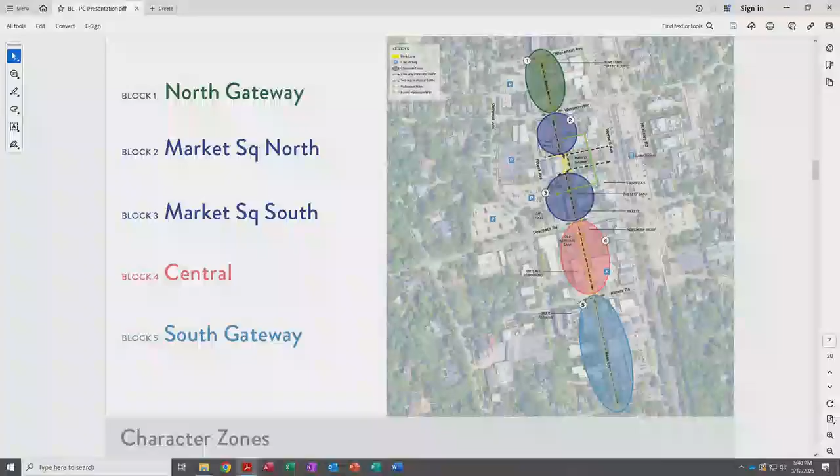So this is really hard to do. I always have struggled because it's so far away, but I'm going to start with Block 3, because Block 3 is the block, to me, we're starting that now, right?

The construction and more detailed design - this is where it came out in the wash, and the idea that we can tie into Deerpath and create a kind of continuous streetscape coming around the corner.

Things to consider here were the scale of Bank Lane - we kept hearing European, or almost like that alley type scale, very narrow. You have a few parallel parking spots. So we did a bunch of different concepts, but this is what was the preferred concept.

That concept shows brick pavers throughout, both in the street and the sidewalk, allowing for more flexibility. So that was something that, if we're able to, we're showing the idea that we can have bollards on the ends and close it off for maybe a festival, a market, on the weekend, whenever, so that you can have tents out there and people walking out on the street and enjoying that.

Keeping in mind those east-west connection points to parking and other things, we're always trying to have some kind of connection there visually. So we show the idea, at least conceptually, of changing the paving so that you can go to that cool little plaza or alley behind that leads to Starbucks, and then extending to the west as well.

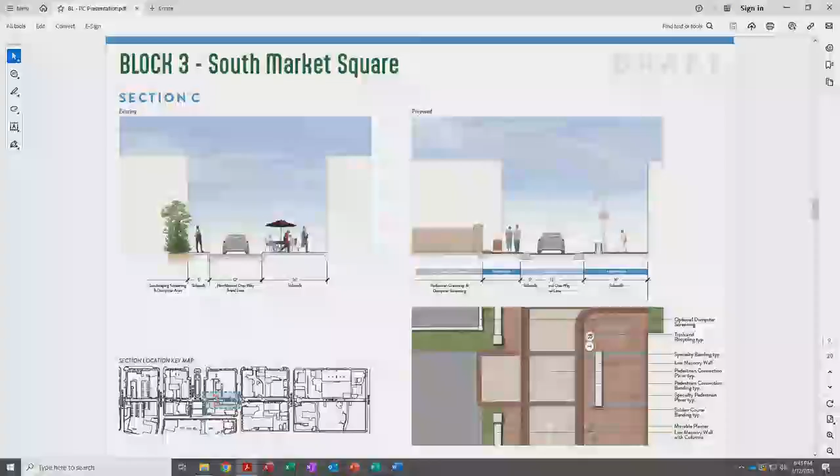Moving north to the North Market Square block, what we really did is we didn't take out any parking spaces, but we shifted some stuff around to align with what's happening on the blocks. Specifically, you have this great plaza with the water feature there, but then there's a parking space right by it, so we tried to shift some of that around so it made more sense and felt more cohesive.

But again, in this block it still has that tight character, so again bringing the brick pavers into this zone as well. We have a little bit more room to get some street trees or landscape elements in there. We've been very judicious about where those go, because we want to make sure that anything we put out there really thrives and does well. But in this zone we have a few more areas where we do that.

We're bringing in some seating and some benches, and there are still a few parallel parking spaces in this area that allow for convenient spots - if we're going to pull up and go to the post office, or just hop out for a few minutes, you've got those as convenient spots.

This shows an enlargement of that cross section, and how we're delineating the parallel parking with the granite banding, separating that from the vehicular lane. It's a visual way to separate all of those things within the zone - from pedestrian, to where vehicles are, to where parking is, and then pedestrian on the other side.

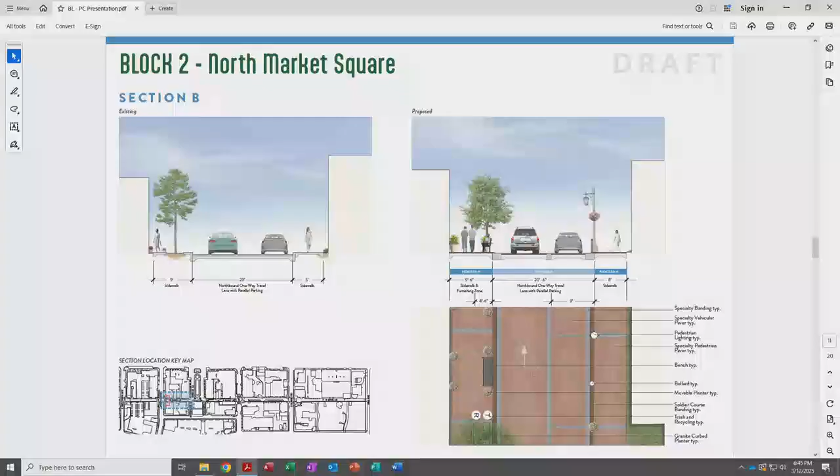Heading to the north, what we're calling the North Gateway area, much different character. You've got Hometown, and every time I go there, it's crazy busy with a ton of people, and it's a great use. But there are a lot of curb cuts in this area. It's just way more open. You don't have that street wall frontage consistently throughout this zone, particularly on the west side where the city lot is.

One thing we proposed here is bringing in a masonry wall that would screen the parking and close off one of the curb cuts of that public parking lot on the west, the one furthest north, so you don't have so many conflicting curb cuts all in one zone, since there are people on bikes and walking around right there. We're trying to eliminate some of the conflict areas, because you really don't need it. You can circulate internally on that parking lot, and that helps close off the gap, creating almost a wall effect like there was a building there.

Notice in this section we just have an asphalt drive, like you have out there now, but bringing the brick paver element at the intersections and crosswalks so we have a consistent look throughout. We're bringing that material in certain zones where pedestrians are, where we want cars to slow down, where we know we're coming to a stop, so you have that linkage and create a cohesive material palette. And we've got more street trees in this zone because we have more light and more area, which I think would really help soften things up.

There are some overhead utilities here. I think that's a consideration - ultimately we want to bury those. There aren't as many here as in the very far south of the corridor, but we're thinking about how to improve the aesthetics of this area by bringing in a little landscape and some of these other elements we're talking about.

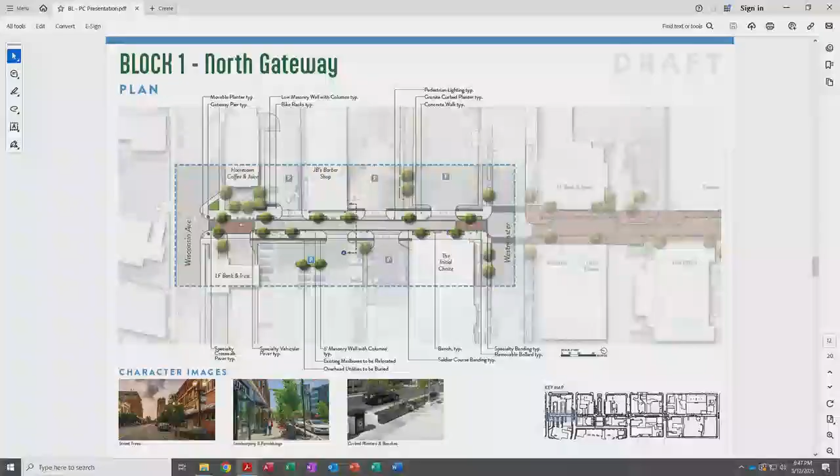This just shows a cross section of that, with the tree and a little landscape instead of overhead utilities and concrete.

Block 4, the central block. This is the block south of Deerpath, the one that has diagonal parking now. We tested a range of things here, from parallel parking to diagonal parking, weighing what people thought, and as of now we're showing this concept with diagonal parking that improves on what's out there now. Right now, if you turn from Deerpath onto Bank Lane going south, you're basically headed into a car parked diagonally - there's nothing that signifies there's a travel lane.

So we're formalizing that by bringing in landscape islands, so you have a very delineated travel lane versus parking lane. We've also extended the parking distance a little bit, because right now it's super tight. A lot of people park, and particularly backing out coming from the parking lot to the east, there's a conflict where people are backing up into the parking lot while others are trying to come out. So we're really trying to delineate everything with visual materials and make sure we have the right dimensions.

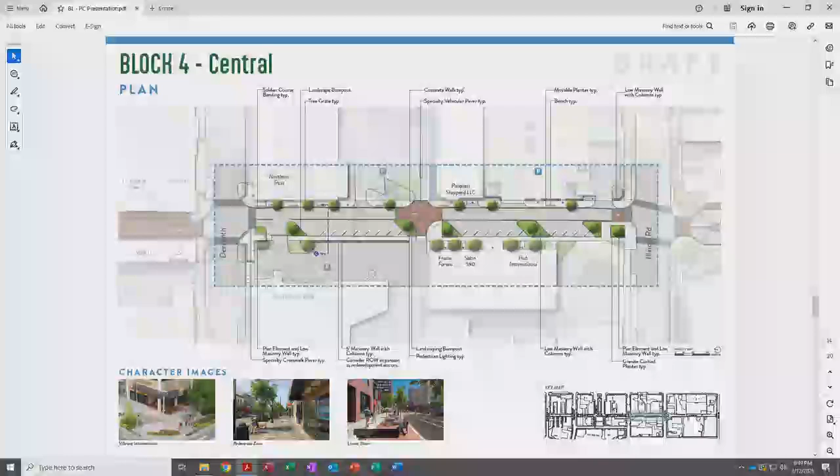And this shows how that works with the diagonal parking - you have trees instead of, right now, the diagonal parking just abutting the corner at that parking lot, where it's pretty open and not the most pleasant environment.

The last block is the one where Deer Path Inn is on the north side, all the way down to Vine - a different character, with lots of stuff happening here. You've got the back side of these businesses, which aesthetically I don't think anyone's really thrilled about, and there are overhead utilities there as well.

Then you've got these really nice residences there - a couple of condo buildings with all their nice landscaping on their property. So the goal here was really to clean up the backside of that shopping center and those businesses. What we're showing is bringing in that masonry wall element I talked about as a screen, to screen the service areas, trash, and utilities.

We would need to bury the overhead electrical utilities if we were going to do this concept, but then really focusing on a pedestrian connection on the west side with some trees, continuous sidewalk all the way from Vine that leads up toward the central portion of downtown. We're breaking this up with brick pavers, bringing that element back into it.

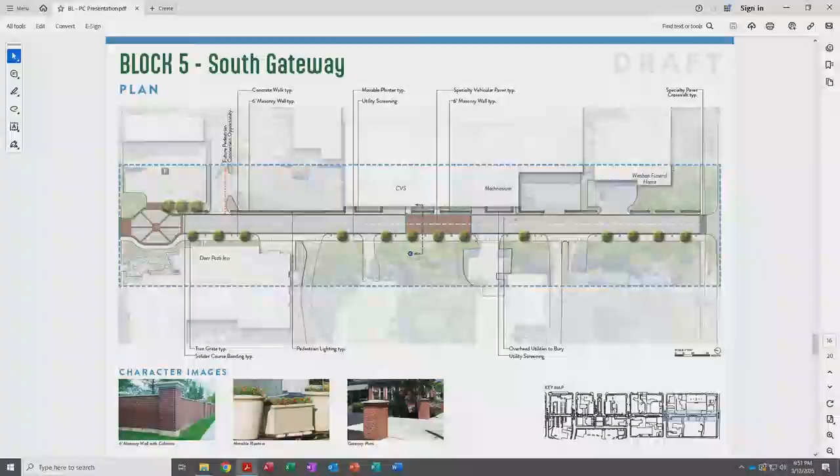This is an enlargement of what that looks like. Right now in the existing cross section, there's the overhead utilities, and what we're showing is a taller masonry wall to help screen the back sides of those buildings, bringing in the trees along the sidewalk on the west side.

Then just the material palette. This was, as we were forming it—we've moved beyond this a little bit with some of the materials, where we made specific selections as we got into the one key block, but always thinking about what it could be, bringing in that higher quality masonry paver, complementing it with the granite you have in Market Square, which is going into Deer Path, using some of those same materials as a complement and a higher quality material.

Other elements in different sections include the street lighting that matches your existing, benches and movable planters, some trees and tree grates—not too many, but we have conditions where it's too narrow for planters, so they'd be in grates. The removable bollards, as well as the bollard on the left side, mimic the ones in Market Square, which will go at the corner at Deer Path and Bank Lane.

The last slide is a series of elements looking at what's happening outside City Hall, using that as a guide for creating a series of seat walls or masonry screen walls, and also using that in piers where we can have a small gateway sign in key locations along Bank Lane to denote where you are. We're even using this idea of an inlay in the paving that says Bank Lane at the intersections.

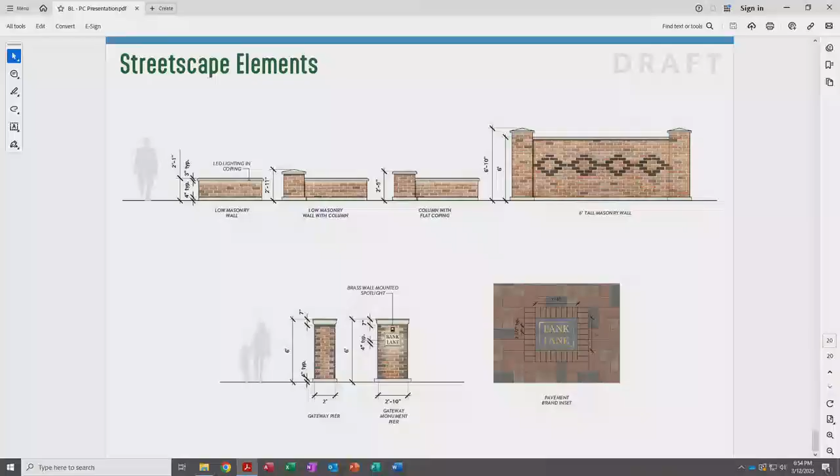Kevin, thank you so much for that presentation. I guess I have a question: should the commissioners feel free to ask Kevin questions all the way from Wisconsin to Vine, or just focus on what's going to be done now, which is Market Square to Deer Path? Questions about the whole length, knowing that beyond that one block there is still study to be done.

I think the one block of Bank Lane and the improvements on Deer Path will really be used to inform us on how the hardscape material works, how the tree grates work, what the bollards look like. So certainly ask questions, offer comments and thoughts you'd like taken into consideration—this project will continue to evolve. There's no timeline for doing the other blocks of Bank Lane. It'll depend on how the community tolerates months of construction, whether we need a break, and certainly budget issues as well.

Sure, thank you. I'll start off and go north to south with you, Kevin, starting with the North Gateway. These were just some things that jumped out at me. On the North Gateway, I like your idea of cutting off the parking lot on the northern end. The next parking lot further to the south—if my memory serves me, that goes out onto Oakwood, right? Is that correct? Or onto Wisconsin also, probably.

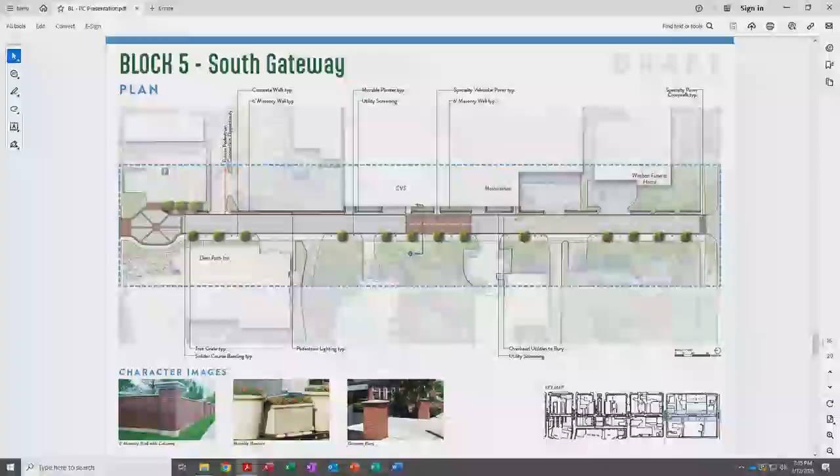Yeah, well, I mean, I really think it would be beneficial, and you don't have to have a lot of... I think you're showing one sidewalk there on the west side, right? You certainly don't need one on the east side, and that would probably be hard to have. So my recommendation would be to make that one-way southbound.

And then my last small but minor point is on the materials, and this is a pet peeve of mine. On the beautiful Market Square, we have those red bricks that are stained white from salt and water and everything else. And I've asked questions over time, and a lot of private and public funds went into that Market Square project. And to me, to have all those white stained bricks, it takes away from it. So whatever bricks you use here, please do not use bricks that'll stain white, either on the ground or on your wall.

And maybe, do you have a reason why they stained white? Well, that's that efflorescence, probably like the lime and that stone coming up through the brick because it's a porous material. But the Whitaker Greer bricks, if you haven't been to Oak Park, Marion Street, we did those in the street there, multiple blocks in their downtown, and that was 15 years ago. And it's a great product, and they hold up really well. I haven't seen that happen there. Let's use those bricks would be my vote. That's all I have, thank you.

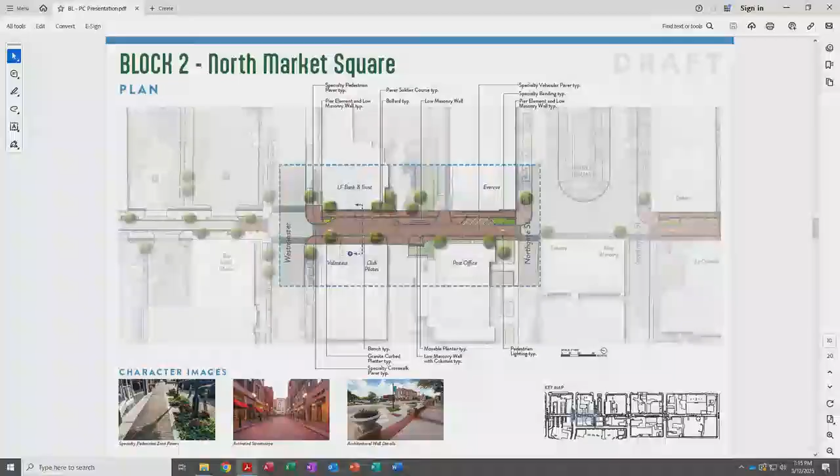That would be possible—show the crosswalks as being that way on both sides. You mean, like how Market Square, to actually put it in the street? I don't know, just throwing it out so it shows you're entering in, just as an idea.

Okay, and you mentioned the trees—so you're going to have more trees here than planters, correct? There's not tons of landscape space, so that's just a maintenance thing too. Just a couple more questions, sorry.

And then you've got the pedestrian lighting again—are we using the bigger lights on Block 2? Is that what you're planning? Looks like it's still the bigger lights. This is a pedestrian scale light, probably about 15 feet tall. That's the existing one that's there. Oh okay, that's right.

Is Market Square right now like that? Okay, I was just curious if it would stay like that. Okay, and then, in terms of what we were talking about with Block 3 at the South Market, just to add...

People had talked about at that meeting, there's a parking lot right by Le Colonial and everything. Those spots are never filled, and every single person that came to these meetings said, who owns it, can we sublet? So when you were talking about the parking spaces, those could possibly be removed, or you could have your delivery drop there in the back by Le Colonial, because they have their dumpsters there.

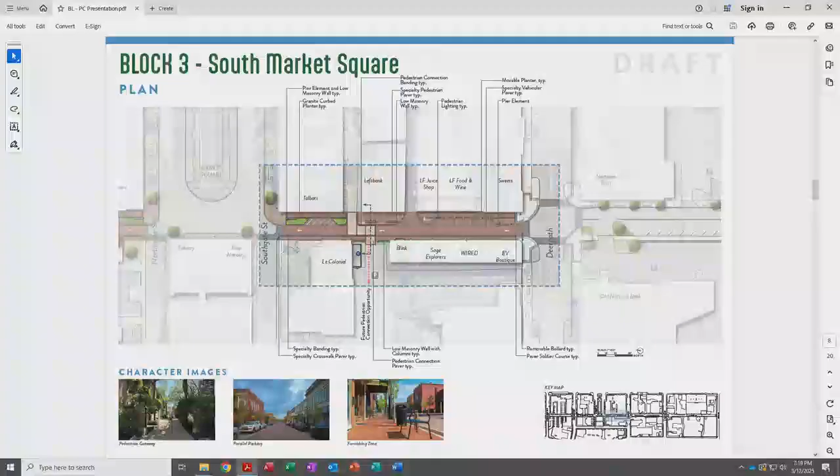The other question I had is on Sweets. You said you're doing like a big corner area. So are you going to have tables there? What's your vision for that?

We create a place for them to have tables. Basically, where that parking is right now, they're using it kind of as a plaza, but it's just parking space. Now we've made it a nice paver area with a little delineated wall, and they can put seats out there.

But anybody then can sit there, right? Yeah, it's just that we're embracing that it's happening now and formalizing that. Okay, because I know that would be a question for a lot of people, since there are a lot of food stores there.

Okay, wait, I'm almost done, I promise. Just trying to—block 3, I got one. And then block 4, you already talked about making that one way, and about the parking spots in terms of the tightness and the turning.

Okay, and when you have the walls, when you talk about the walls of block 4, are they solid? Are you going to make it look like the thick one on the back of your packet here? Yeah, that's exactly what it'll look like. Okay, just checking.

And then, almost done, sorry—I just wrote them on the pictures.

Yeah, I was just wondering, on Block 5, I think it's wonderful that you will possibly bury those wires. I think that's absolutely brilliant. How come the middle section is paved like that? What is it, just seems curious. It's a long block.